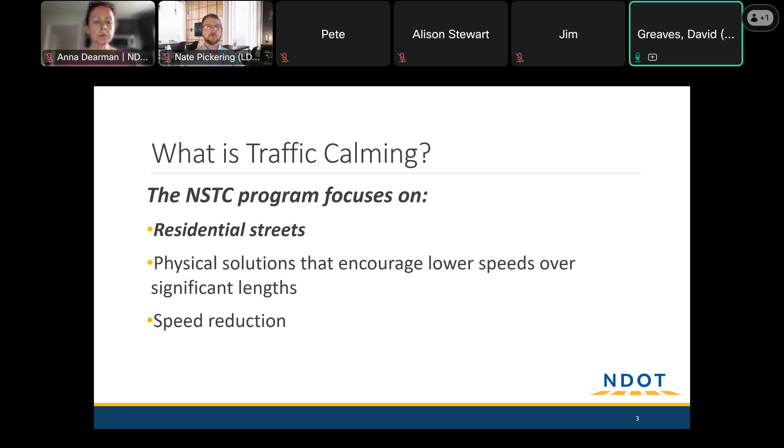This is all closely related to safety and Vision Zero, because vehicle speeds have a serious impact on how safe a roadway is. The infographic shown demonstrates that if a pedestrian is struck by a car traveling 25 miles an hour, they have a reasonably good chance of surviving. However, that starts to go way down as the speeds of vehicles increase.

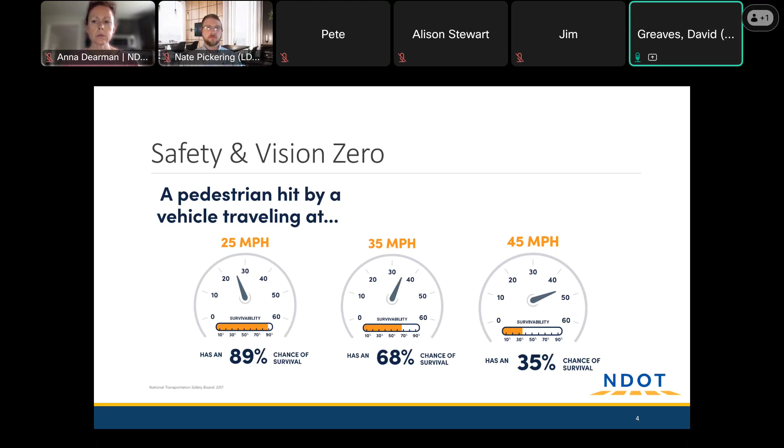The traffic calming program is one that is in pretty high demand. In March of 2025, when Apple Valley Road was selected, you were one of 600 plus streets who had applied. We were only able to select 25 neighborhood streets, and that was done with a prioritization process that I'll explain in a minute. But point being, y'all were selected because there was a pretty demonstrated need for something to be done on this road.

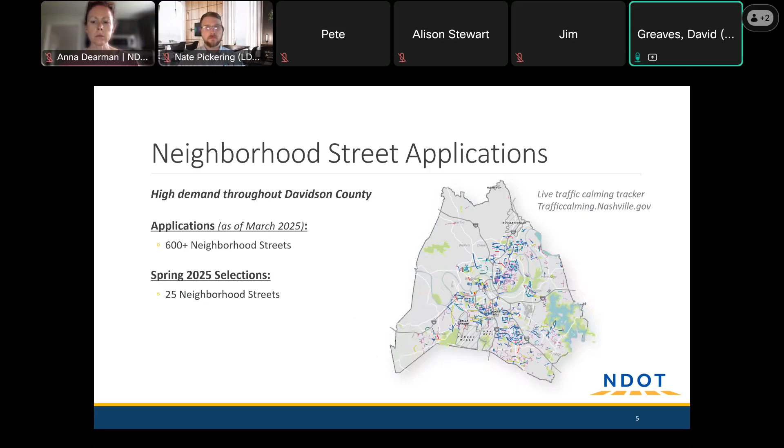There are a handful of tools that the traffic calming program works with, but we might run into some issues that one of these projects isn't really capable of solving - that might be a sidewalk or perhaps a request for a traffic signal. We want to make sure everyone is aware of Hub Nashville as a resource for anything that may fall outside of the scope of things we're talking about tonight. That can be accessed by calling 311, going to hub.Nashville.gov online, or with the app.

Screen just cut out on y'all. I'm not sure what happened there. Anyway, I think we're back.

The prioritization process is a formula that is weighted according to the pie chart to the right. Basically, when a street applies, we start the traffic calming project by conducting a study of all of the applications, and we measure vehicle speeds, volumes, crash history, whether or not there are sidewalks or bike lanes, and your proximity to trip destinations such as schools, libraries, parks, and a couple other things. All of this adds up to a score that is ranked among all of the other applications, and then when it's time to make the selection, we just take those top 25 streets.

We'll get into some of the specific data that was collected for Apple Valley in a second, but we just want to make sure everyone knows this is a data-driven process that resulted in Apple Valley being selected.

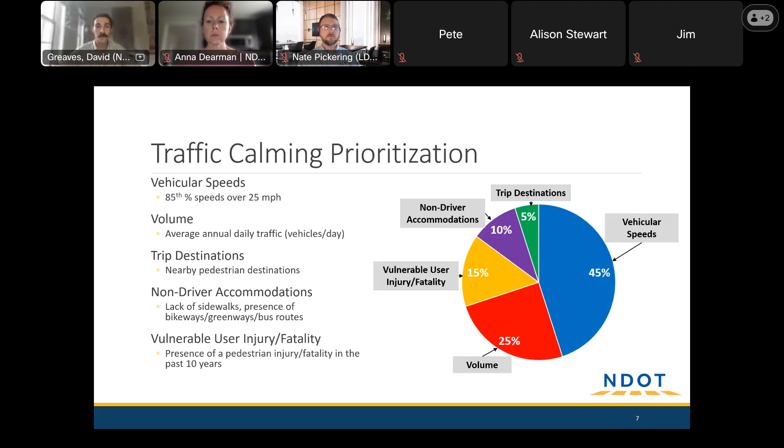We found that the 85th percentile speed was 39 miles an hour. What that means is 85% of people measured were driving at or below 39 miles an hour, and 15% of drivers were driving even faster than that.

That is pretty fast for a residential road like this, but it's one that has had traffic calming on a different segment further down on Cuniff Parkway. So it wasn't incredibly surprising that y'all are experiencing this pretty serious speeding.

You also have a pretty good amount of volume, so 1,500 vehicles per day is a reasonable amount for a neighborhood. And the width varies quite a bit—at its narrowest it's around 26 feet wide, and at its widest it's about 40 feet wide. We can talk about how that affects some of our design decisions in a little bit.

But all that is just to say, we've observed that you are experiencing a pretty fast pattern of travel along this road.

I know I've covered a lot of introductory information. I want to take this moment to pause and just ask, do you all have any questions about what I've covered so far? Any other thoughts?

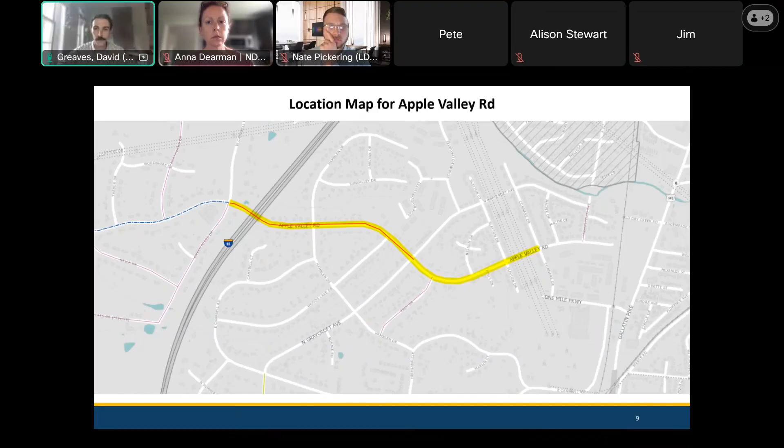Got it, yeah, that's good to know. And we can definitely take a look at that in our design and think about how we might improve that.

Any other observations or thoughts before we talk about some of the tools in the traffic calming program?

Aaron Coleman here, I had a comment. I live on the corner where Apple Valley turns into Cuniff. What I've noticed is when people go from Apple Valley into Cuniff, that intersection is massive, and people take that turn at a pretty high rate of speed. They take it so close that my yard gets a little rutted up where cars run off the road. It's difficult for me to walk my daughter to her preschool at the church across the street, even with the speed bumps in place.

That's definitely good to know. I know there are speed bumps on either side of Green Acres Drive, and I'm sorry to hear that wasn't the complete solution we hoped for. Am I understanding correctly that it's vehicles turning from Apple Valley Road onto Green Acres or West Campbell, or is it in all directions that see those fast turns? I see the fast turns primarily from people coming from Apple Valley turning onto West Campbell. Got it, that's good to know.

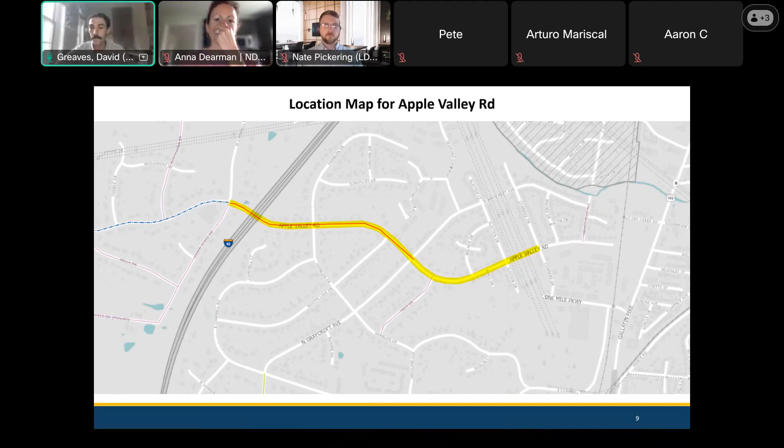Let's move on to some of the tools. I'll try to address how we might use those in the design to tackle the concerns we've heard so far, then I'll turn it over to Nate to walk us through the preliminary concept design he's developed. We want to hear your thoughts and ideas on how we might alter the plan to best fit your needs. The first tool in our toolkit is speed cushions.

By a pretty wide margin, these are the most common tool we use in a given traffic calming project because they reliably slow down vehicles on average. As one attendee noted, they're not a foolproof solution that forces every person to drive safely, but in general they improve the data on the street.

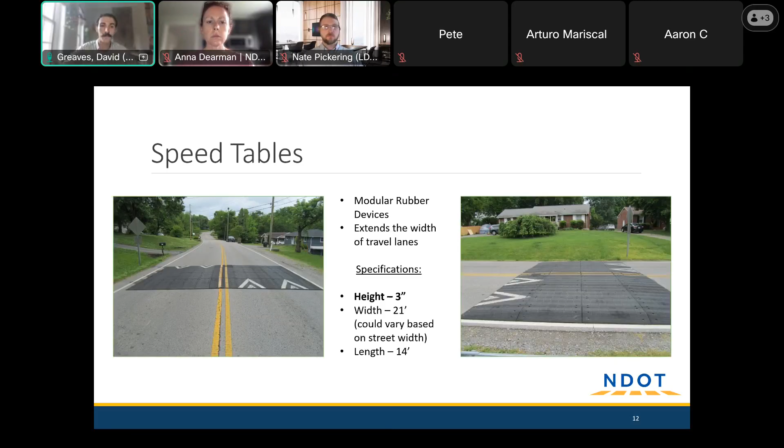Speed tables are really similar - made of the same modular rubber materials, the same height at 3 inches. The only difference is they stretch all the way across the road instead of having gaps. The gaps are an intentional design decision so emergency vehicles with wider wheelbases are less impacted - they can come closer to shooting that gap with their wheels, maybe touching the tapered sides, whereas a smaller car or light truck would be more impacted by the speed cushions.

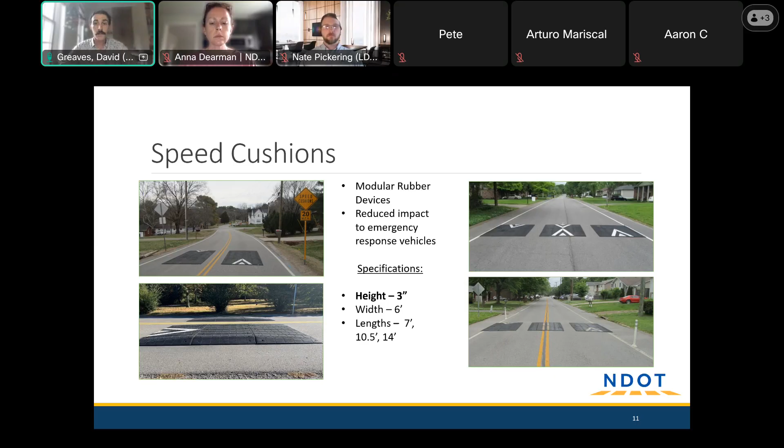We find these to be pretty reliable. This shows results of a limited study NDOT conducted in 2023, taking before and after data. Over 6 projects, the average speed came down from 31 to 22 miles an hour, and the 85th percentile speed came down from 37 miles an hour to 25. You all were a bit higher than that at 39 miles an hour, but even so, we feel optimistic that a design featuring speed cushions or other vertical measures would drastically improve the speeding situation we're currently seeing.

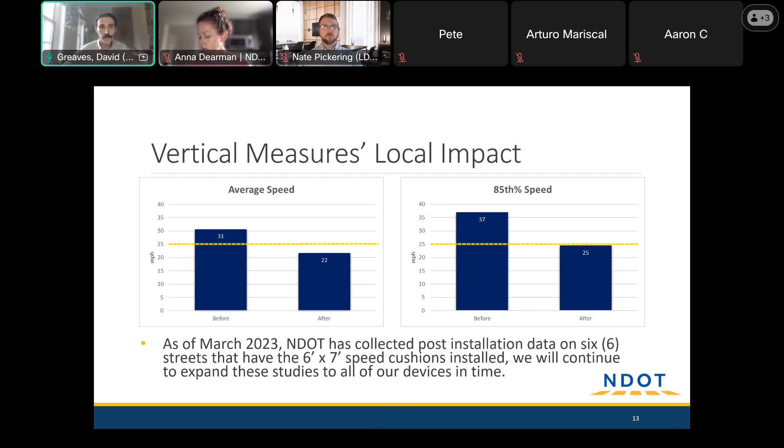Now, speed cushions are not available in every single spot - we try to avoid curves, and we have to avoid steep hills.

So there are plenty of occasions where we can't rely on them exclusively. In those situations, we'll often pull out what are called radar feedback signs. These are solar-powered signs that report the speed the driver is going back at them in comparison with a speed limit sign. So importantly, these are for information only. They don't write any tickets, do any other kind of enforcement. They're simply a reminder that if you are going too fast, that you should slow down, but they don't do anything to physically affect one's driving.

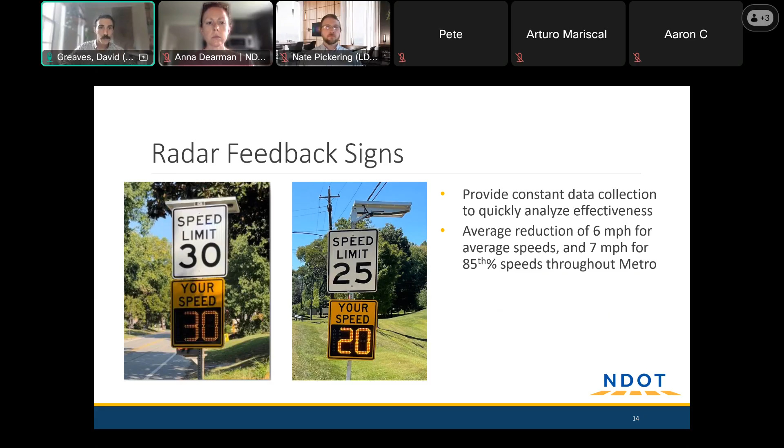Similarly, we have what's called pavement narrowing. When a road is wider than it needs to be to move the traffic it's supposed to move, that can induce faster speeds because drivers are a little more comfortable going at a higher speed, knowing they've got room to work with. As opposed to a narrower street, which feels a little more claustrophobic and induces a bit more caution from the driver's perspective. Again, these don't physically affect vehicles like speed cushions or tables do. They're more of a psychological measure to induce lower speeds just by changing the feel of a roadway.

One side benefit of this is it can help pedestrians who need to walk on the road if there aren't any sidewalks. These are a nice way to provide a little bit of a shoulder so you can feel more confident walking on one side of the line where cars should be on the other side. Again, it's not a physical barrier, but it is something that makes pedestrians feel a little more comfortable at times.

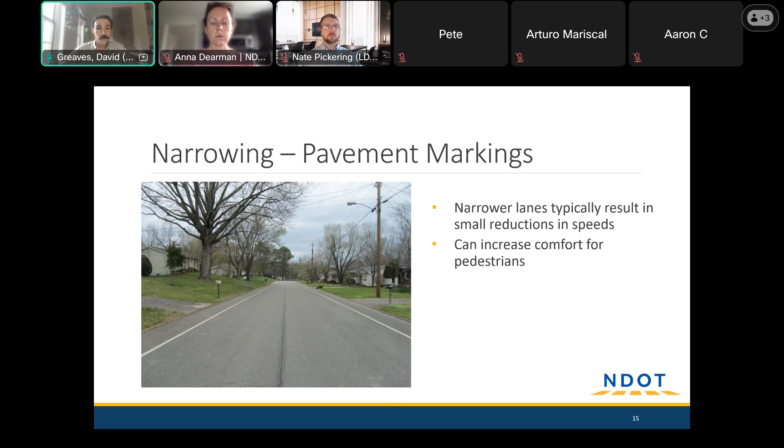Similar to narrowing along the length of the road, when we have really large intersections, that can induce speeding at the turns. We all kind of have a feel for this - when you're turning onto an interstate ramp or something with a really wide radius, you're able to take that turn much faster than, say, if you were making a hard right into your driveway. Those are sort of two extremes on the turning radius speed relationship.

So when we see an intersection in a neighborhood like this that has really large turning radii, what we can do is narrow the intersection from the outside in, tighten up those corners, and that helps to make sure that vehicles take their turns through the intersection at a slower rate.

This can make it much more comfortable to walk and bike, knowing that you're not going to be surprised by a turning vehicle. If you're driving, it gives you more time to notice if a pedestrian or cyclist is crossing the road so you don't run into them. And it also shortens the distance that pedestrians need to cross, because you don't have to cross all the way from corner to corner - you're really just crossing the two lanes of travel.

In neighborhoods that see a lot of street parking, they can also help improve sight lines by making sure nobody is blocking visibility to crosswalks. So that's another added benefit of these where there is street parking present.

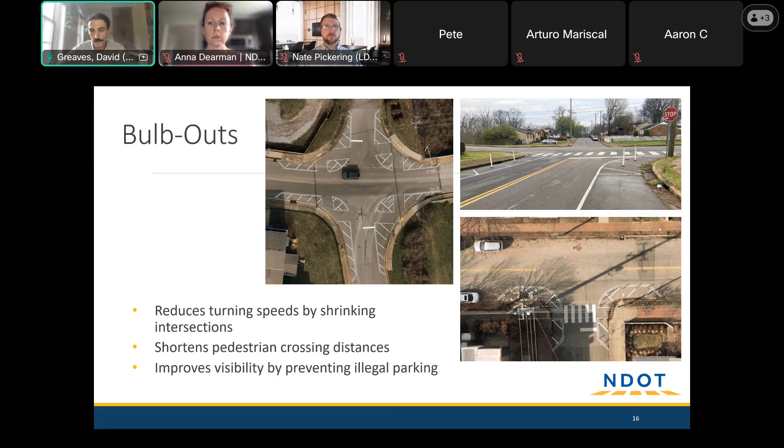Sometimes when we have pavement that is not being used, this could be in the case of bulb outs or maybe shoulders, perhaps more curb extension kind of treatments. Occasionally we'll do something called depaving. Depaving is where existing asphalt that's not needed for vehicles is actually removed and replanted with either grass or some other kind of landscaping.

And this has a couple of benefits. It reduces stormwater runoff by absorbing rainwater into the earth. So when rain hits asphalt, it has to go either into somebody's yard, a ditch, or the sewer - it can't seep into the pavement.

It's also a good way to increase green and open space. We all generally prefer to look at plant life, grasses, and things like that rather than asphalt that's maybe not necessary. And when the sun hits asphalt, it actually heats up the ground much more than if the sun was shining on dirt, leaves, or trees. So depaving can reduce the temperature in summers by reducing the heat island effect, which is when highly paved areas get hotter than they otherwise would be because the pavement is there.

So what we're looking at on the right in those images - the first one with the food truck - is kind of the beginnings of a depaving project. It's not super attractive, but the disturbed earth is stabilized with seed and straw.

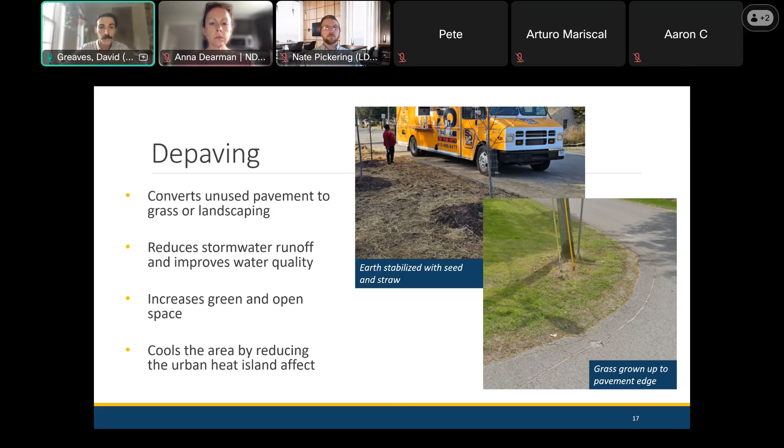After a few weeks, maybe a couple months, the hope is that will grow into a nice lawn, and we'll have a transition from pavement to grass like we see in the right-hand corner. We've done this a couple times in Nashville, one example being Clifton Avenue. Here's a before and after picture: the image on top is before, and after the project we were able to add a little landscaped area where that pavement wasn't being used.

Now, the stormwater conditions on Apple Valley Road aren't quite the same. Y'all generally have the asphalt just end in the shoulder rather than curb, gutters, and storm pipes. So we may not build a little channel like this, but the idea is to add grass and get rid of asphalt that's not really doing much.

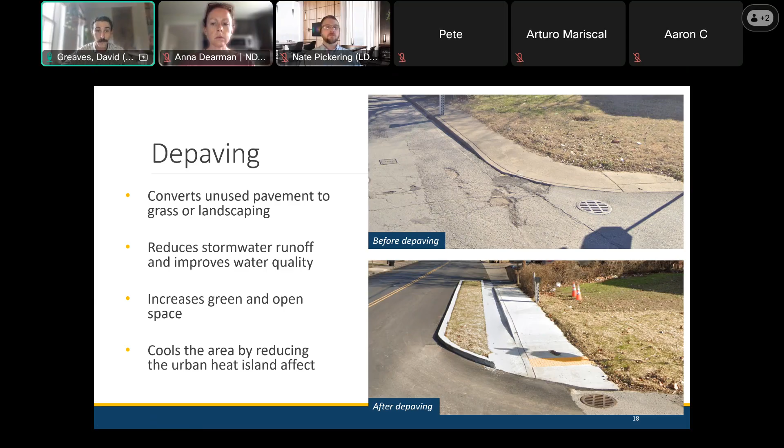On wide sections of road, we sometimes do what's called chicanes. This is where we take the center line of a roadway and zigzag it back and forth, inducing slower speeds by forcing drivers to maneuver along the length of the road. Generally it only works when we have enough pavement to safely go back and forth and enough length to transition in between. We definitely don't want to surprise anyone and wind up with a head-on collision, so we do whatever we can to avoid that.

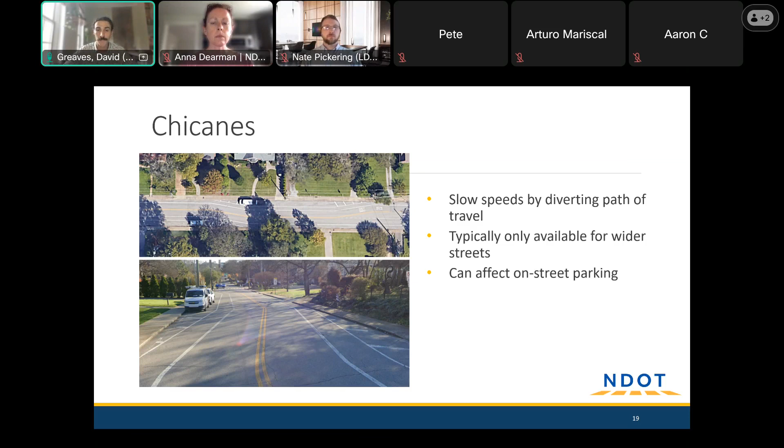The only real downside is that sometimes it affects on-street parking, because we shift both travel lanes to one side, and at that point you wouldn't be able to park in that lane. I don't know if that applies to any particular places on Apple Valley, but it's something we do from time to time.

And then lastly, we have traffic circles. These work similar to bulb-outs, but rather than narrowing from the outside in, we narrow from the inside out. This works like a roundabout: all drivers are expected to start by going right, and if you're making a right turn you just keep going that way. You traverse counterclockwise around the circle if you're going straight or left.

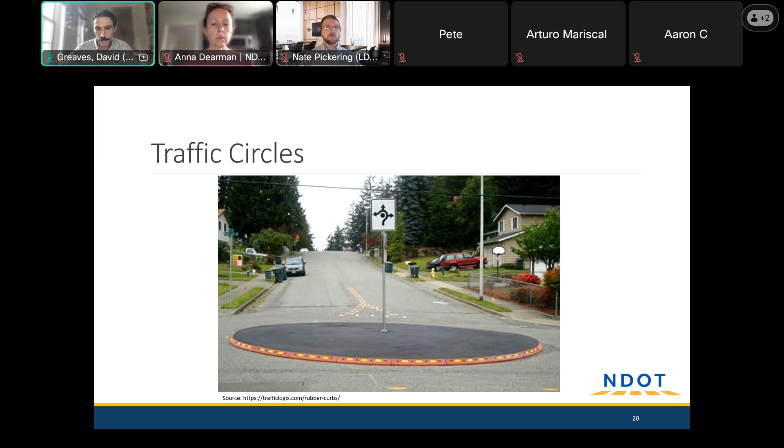But before we dive in, I want to check back. Does anyone have questions about any of the tools we've discussed?

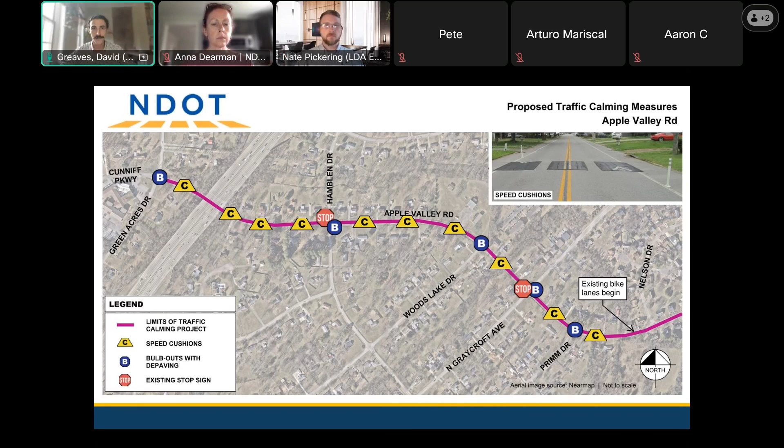Absolutely, thank you so much David. If you guys have specific areas you want to look at in these plan sets, we'll be going through them, not necessarily page by page in full detail, but if there are specific locations you want us to look at, I will gladly stop and spend as much time as you feel you need on that as we go over some of the designs we put in.

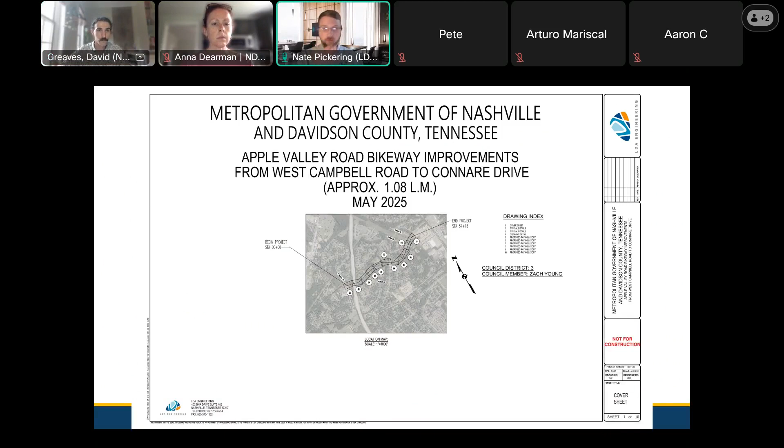So we did a speed cushion layout for the majority of the project, as shown in the previous highlighted portion. We carried an existing bikeway improvement on that buffered bikeway to really create that separation. I jotted down a few notes about West Campbell that we covered earlier, so we'll look at that as well. We already have some bulb-out portions there, aiming at reducing turning speeds coming in and out, protected by flexible delineators with some striping.

The goal with this intersection was to make it safer and more accessible. So we reduced the travel lane width in each direction down to the acceptable minimum. This also includes retention of the centerline in this area, just to make sure as these cars are entering the area, they are safely separated.

And it will immediately go into our speed cushion layouts. Now, with the speed cushions that we've included here, we are doing 2 speed cushion installs, as well as flexible delineators attached on each side.

These flexible delineators are placed such that cars can't easily go around the speed cushions. Now, they are plastic posts, so cars can generally just drive over them. We do not like it when they do that, and if they continue to do that, then we will be more physical with the response next to it.

The area highlighted in teal is a de-paving proposal, really aiming at reducing that intersection turning radius for good. Whether or not people decide they want to run over the striping or the delineators, we will be removing set amounts of asphalt throughout the road such that it will permanently create that turn hardening effect.

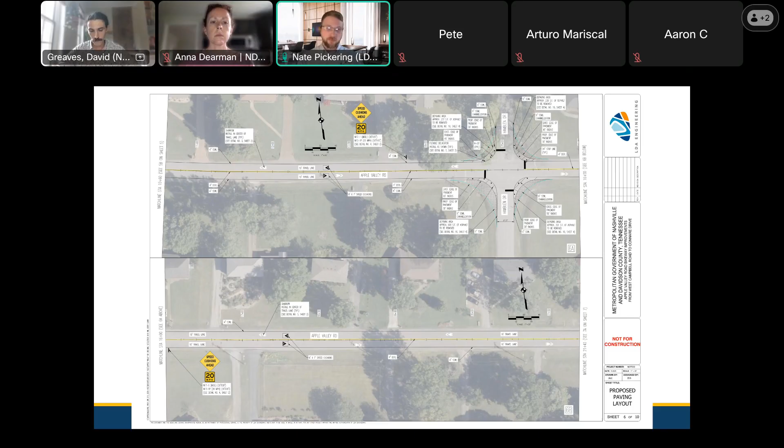With the increase in speed cushions, they will be going slower on approach to the intersection, hopefully promoting a safer intersection and less people running stop signs. We have sharrows marked throughout the project to highlight it is a shared route and cyclists can share the road with cars.

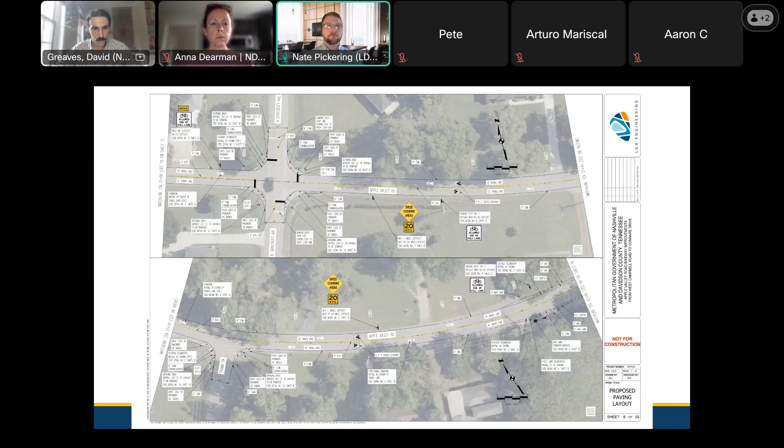We have more turn hardening and de-paving on these intersections. And here's Graycroft. We've done a very similar design to the Hamblen intersection, making sure we have speed cushions on each side of the approach and increased de-paving.

So down here, we have the transition into the existing buffered bike lane. What you're seeing here is a proposal for increased separation, more physical separation. We have a new product called a cycle lane, and it is about 4-inch high plastic, about 2.5 feet long piece of rubber that is meant to deter traffic back into the lane. It's not as physical as an armadillo.

If you've seen those, we've installed them at Riverside Drive and a few other places. This is very intentional to push cars back into the roadway as opposed to just being a physical bump to drive over. And it creates more separation and a safer environment for cyclists and anyone walking along that roadway.

And this is an existing buffered area. And we're looking at these intersections as well with turn hardening, not necessarily de-paving because there is some curb in this area. And so whenever you start to de-pave those areas, you have to check with stormwater areas and make sure you're not redirecting any of that water into any neighbors' houses.

And so this continues all the way on to the finish of the project here at Connare, connecting into the existing bikeway.

And again, if you have any specific places you want to check on, feel free to post those and I'll happily cycle to it and we can look at any specific problems you have.

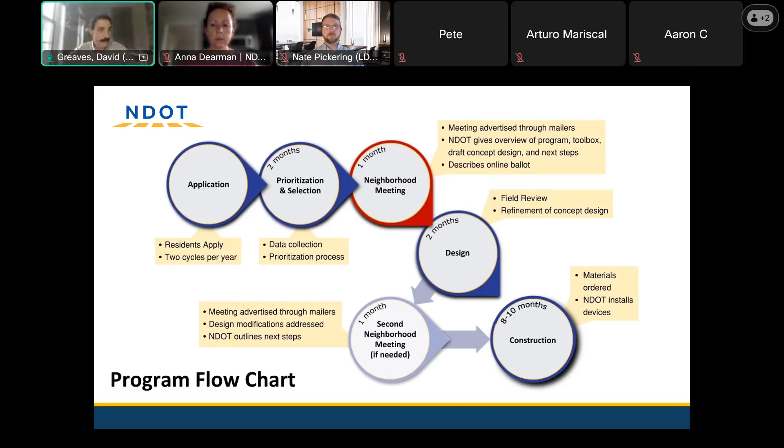Any other final thoughts? David, let me say a couple more things while folks are thinking if they have any final questions.

Typically with the traffic calming program, a neighborhood applies, they're selected, and then they vote on the traffic calming. Because we are installing these bikeway upgrades for this planned bikeway, we actually need traffic calming as part of the bikeway facility. So even if your street hadn't been selected for traffic calming, we would actually be pursuing traffic calming on the street as part of the bikeway. For that reason, we're not holding the typical balloting process. We're holding this meeting, and we can have another if you all need to talk through what this design looks like, what you're interested in.

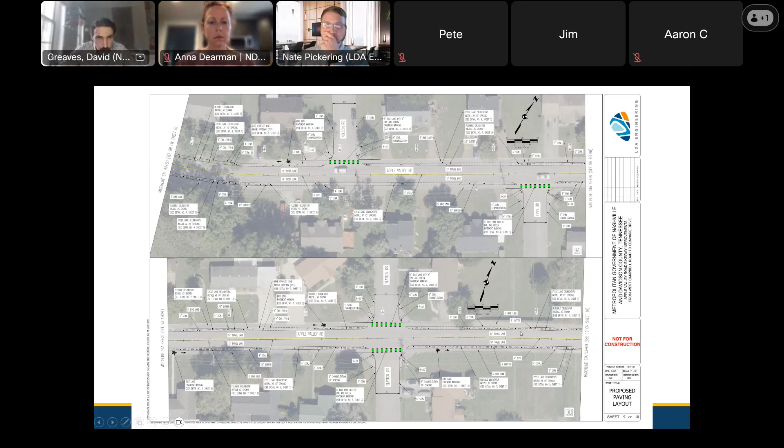Yeah, so there's a stretch where the large power lines go over, where there are no driveways. I see - so that would be to the left third or quarter of this image. That's just fields, no driveways. Yeah, we can absolutely look at that. Thanks, thank you for pointing that out. I appreciate that.